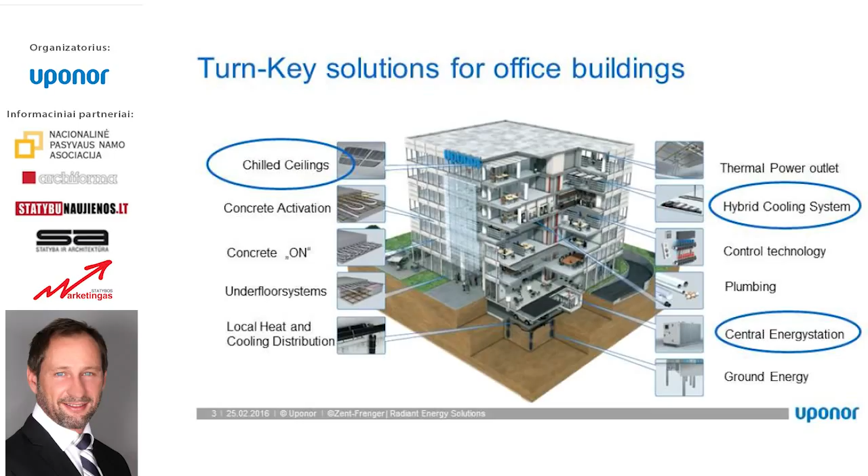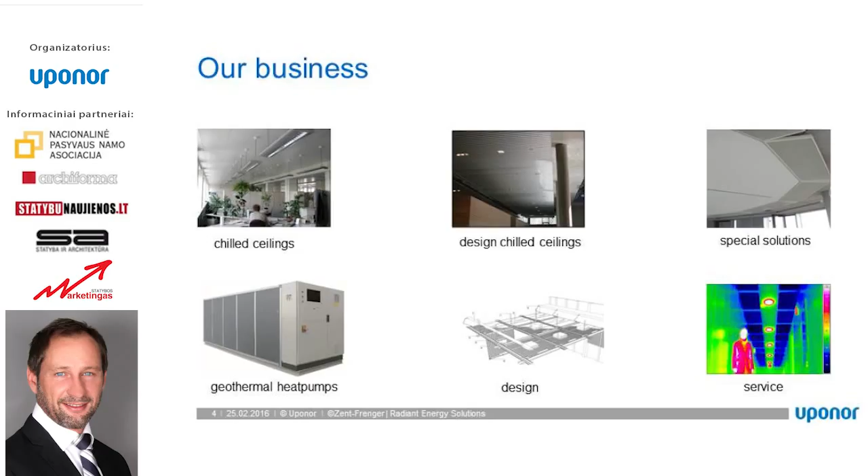Our business is to create ceilings, whatever kind. To design ceilings, special solutions, geothermal heat pumps. We do design for the ceiling system itself, for sub-constructions, and finally also for maintenance and service. You can see some pictures. This is the range of what we want to do for you, and where we want to support you for your project.

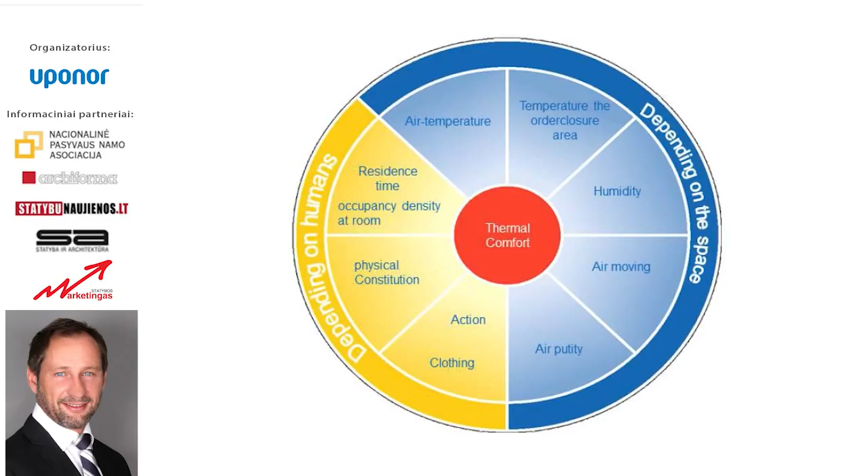What we can do is the part depending on the space, on the room. And there are really big points: the air temperature, the air movement, the draft, the air purity and the humidity. These blue things are all things that we can create, that we can design with engineers and architects. There we, as experts, are responsible.

And when I search via Wikipedia for thermal comfort, I get a response that thermal comfort is defined as the state of mind of satisfaction expressed with the thermal environment. So, in other words, when we go with a radiant system, we are relatively safe that we have no airspeed, no draft. We are nearly 90% always at the right operative room temperature. We can control the humidity and the floor temperature.

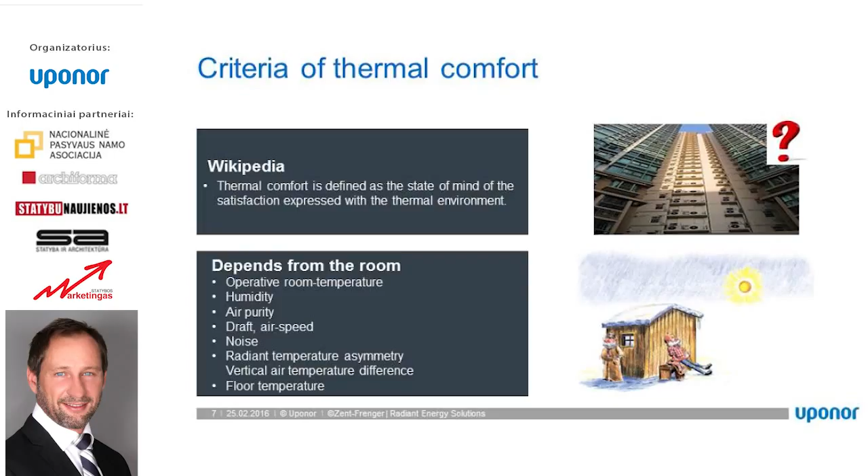For the radiant system itself, I have a small funny picture. You all know the situation when you go skiing and you sit in the sun. And it's the same if the outside air temperature is 10 or minus 10. Always when you're in contact with the sun, this is radiation. Yes? And immediately you feel well.

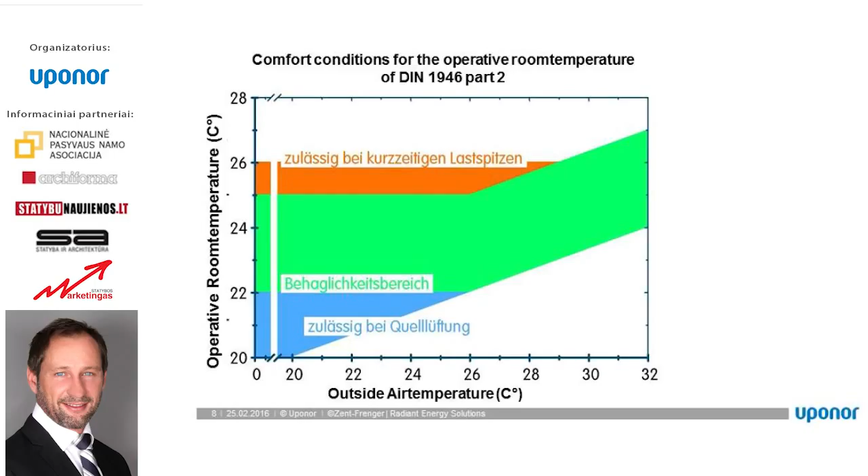So if we have a look into the DIN 1946, there is a definition of an area with thermal comfort in the green area. And there are so many investigations and measurements about dissatisfied people based on the temperature or other things we see later in the sheets. And you can see the axis directly relates the outside temperature and the room temperature. You see there's a small range between 22 and 25 degrees. This is the thermal comfort zone, and that is the zone where we want to be.

And also we know the problem of dissatisfied people based on airspeed. I think everyone knows the assistant who is working directly below airflow, and he feels not well. Yes, and in the worst case he gets unhealthy, and this is the worst case.

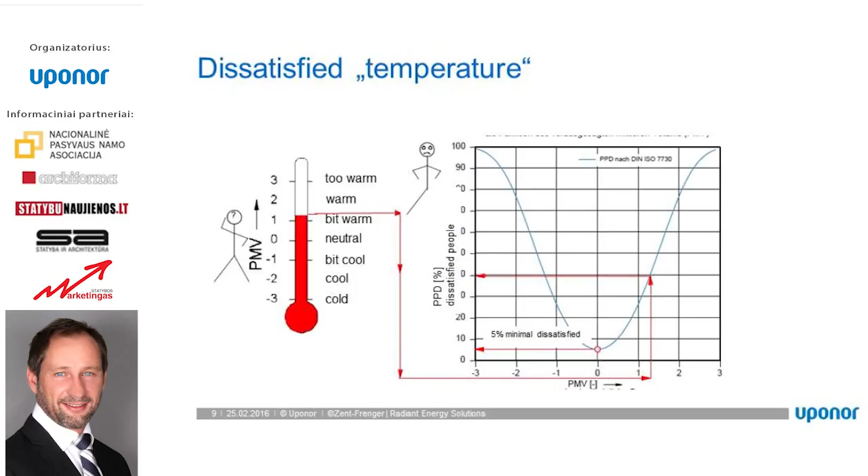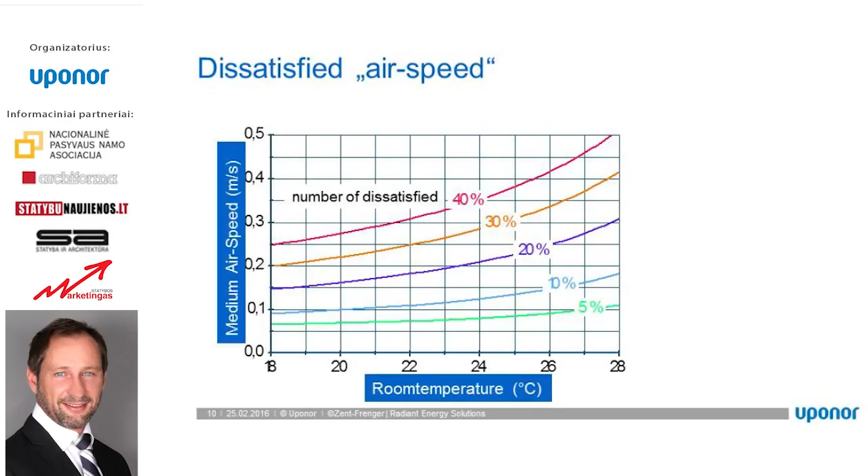And what we have with the temperature is also the same for the airspeed. That means if you design your project with conventional air conditioning systems, you always run the danger of air draft to the people, to the employees. It's also a function of the room temperature and a function of the airspeed. You can really see relatively simply the number of dissatisfied people.

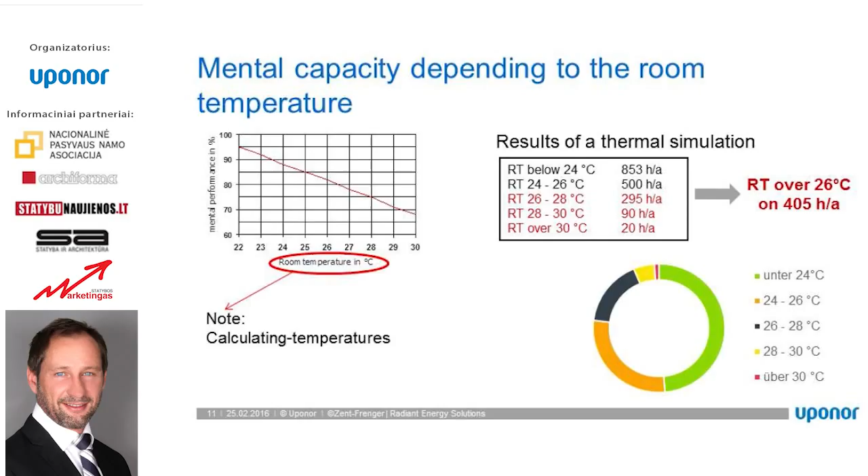Apart from thermal comfort, another very important topic is acoustic comfort. The chilled ceiling always includes, as I mentioned, two parts, the panel itself and the aquifer meander. And when you look only at the panel, as you could see in the small sample outside at the desk, for different panels with different perforations, we earn different acoustic absorptions. You see a standard system, like the small sample outside. We have a perforated metal sheet, and inside is an acoustic fleece.

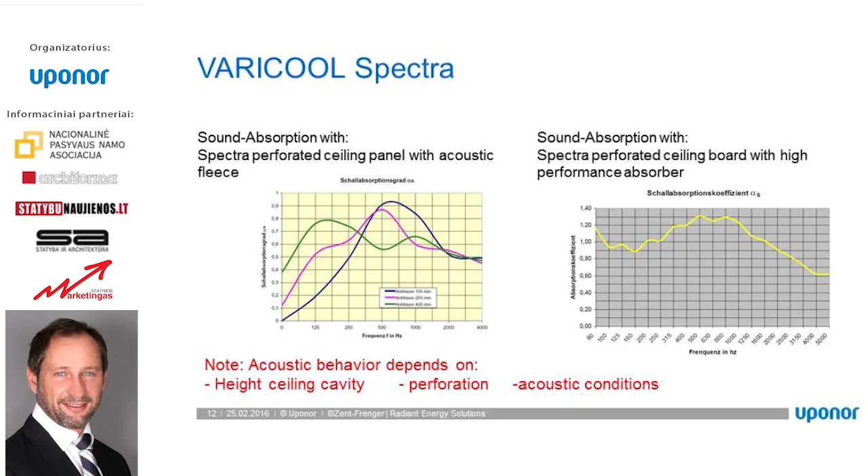And this is the other system, for example, in our system, VARICOOL Spectra, with a high absorber performance system in it. And you see the difference in the absorption coefficient against the standard system. So that means you can control the temperature and you can also control the acoustics in your room.

As a summary of thermal and acoustic comfort, I want to show the main important topics when using radiation systems. The most important thing is the temperature of the room. We have no draft, we have a direct capacity. Remember the sample with the sun and the skiing tool - this is direct contact with the energy. We can absorb acoustics, and it's also possible to integrate cuttings in the ceiling, like lighting or sprinklers, or whatever else is always possible. Flexible room separation, minimum space requirements - so finally we get in the right direction for thermal comfort.

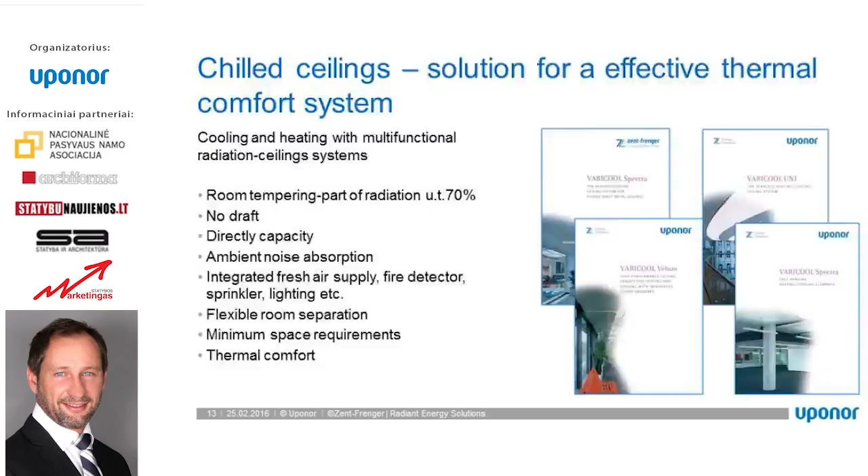So for each design the architects want to have, we can build up a solution with radiant systems. Every ceiling system could be upgraded with a radiant solution. In this range we have the chilled ceiling systems, we also have concrete systems and additional systems, and also geothermal heat pumps. This is what Ray tells us about.

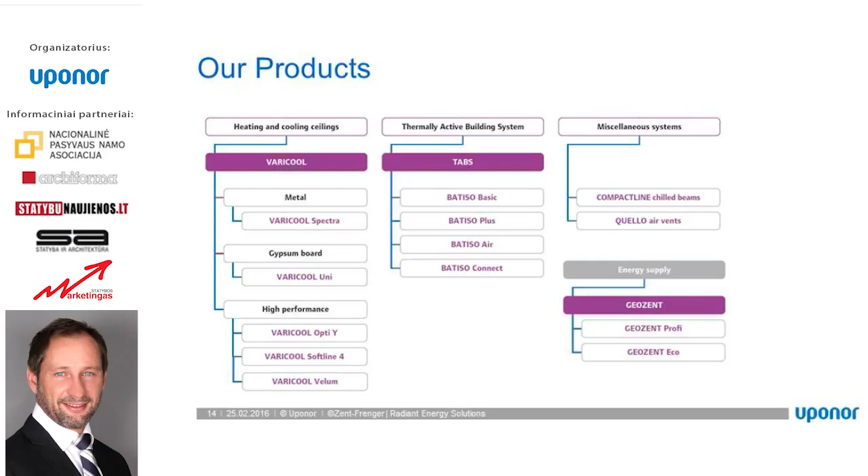But we want to have a focus more on these ceiling systems. We have a part of the metal ceiling, we have a part of seamless gypsum systems, and we have some products as a high performance system with high capacity, also in the case of acoustics.

So let's start with the first product. We call it VARICOOL Spectra M. M stands for magnet technology. The construction is: we have a meander, or a snake, of copper.

Aquifer copper, based in aluminium profiles and fixed from support rails. Then separately we have the panel. Inside you can see the acoustic fleece, and this element we call the register element, or activation, or meander - different names. In detail you can see why we call it Spectra M - the magnets drive inside.

And this is the most important point: that we can really get close with the panel, with the steel panel. We take care that the energy goes the way we want - on the surface from the panel, from the pipe, over the aluminium profile, onto the panel.

So the big advantage of this system, Spectra M, is it could detach from the ceiling panel at any time. That means if you have built or constructed a project, and 5 years later the color of the panels depends, gets spots and scratches and whatever else - we can just remove the metal panel. It's quite simple to change the metal panel, and the register element, the complete hydraulic part, the installation stays in the same place. We never touch them, and this could really be a big advantage.

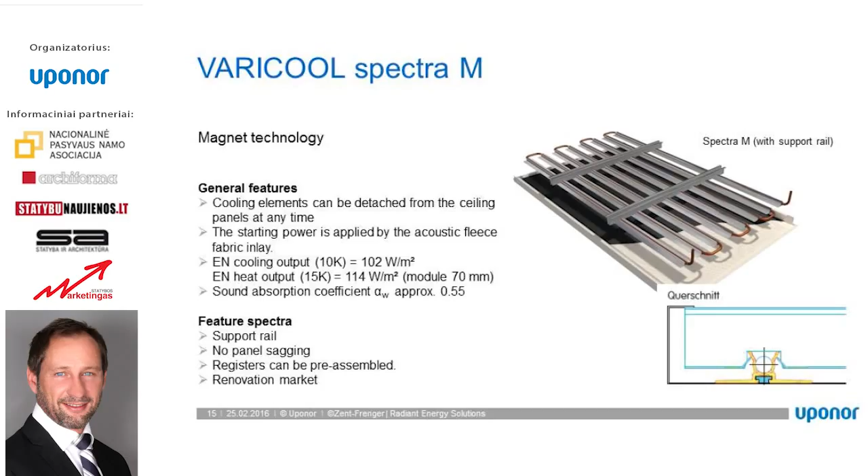The system Spectra K is a bit different - you can see it also in the detail. We have no magnetic stripe in it. This is the reason why we call this gluing technology - in German, Kleben - because whenever you need a bit more power, it's possible to use as a panel system not a steel panel, because of the magnetic requirement, but an aluminium panel. So we can earn an additional nearly 10% more capacity, but only with a gluing system.

We do it customized also for the Spectra M systems, in every range, with every number of rows, with every kind of pitch you need between them. You can do it all customized, especially for your project. But there are also some standards with cassettes of 600 by 600, or the German standard of 625 by 625.

This kind of ceiling you can very often see in supermarkets, schools, or some office buildings. And from the capacity, we talk about 85 or 95 with 6 rows. You can see the difference is not really far from the magnetic technology.

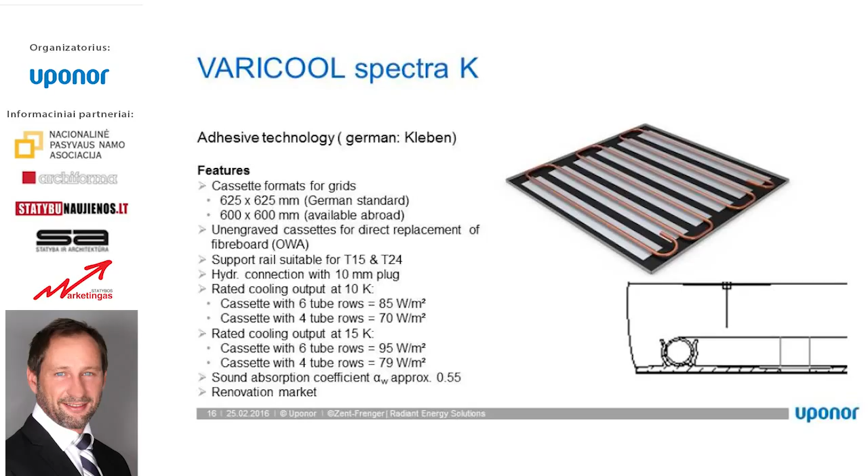The Velum system, we call it ourselves a hybrid system. Hybrid in the case that we talk from a radiant system, from an air system, from an acoustic system, and also a storage system.

So I'll tell you why. When you have a look at the construction, you see the aluminium profile. It will run on the below side, and it is also possible at the same time to run on the upper side.

And when the function goes to the upper side onto the concrete ceiling, we can store the energy into the concrete ceiling. It's mostly effective when we do this during the night, and we can save up to 30% more energy.

During the day, we stop the water circuit, and the concrete ceiling can stay in touch with the room until the energy, or the charge, is empty. Then we continue with the normal way of doing radiation.

Between these profiles, we use a high absorber acoustic element, and it's also possible to use this channel as an air channel to supply the room with the air necessary for ground airflow. Altogether, these are really big advantages, which is why we call it a hybrid system.

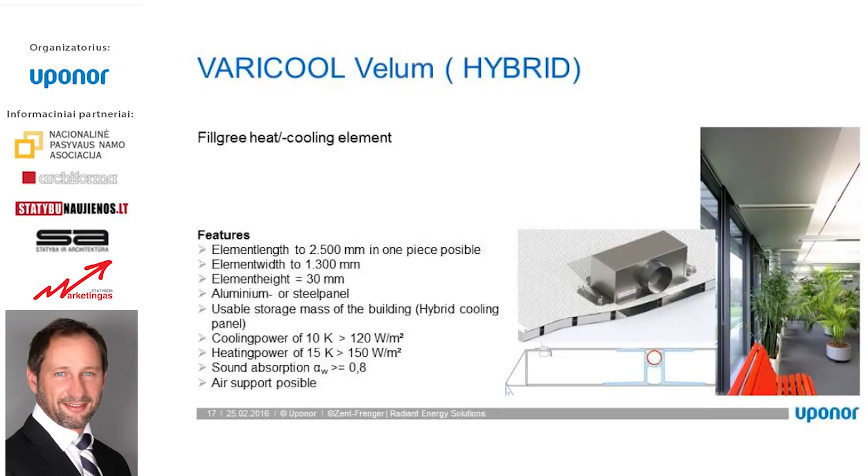The maximum length for this element is 2500mm, with a width of 1300mm, and a big point is the element height of only 30 millimeters. For example, in Switzerland and Austria, it is a bestseller because architects love it—it's a really small design.

The same Velum system, you can see here the big point again is the design with only a height of 30 millimeters, available in a rectangular shape or also in a 60-degree angle. It looks even lighter when shown this way.

I'll talk about the airflow. It's possible through the perforation to flow the air upward or downward—both directions are possible. Remember the air function combines the radiation part with the additional convection part, and it's also fantastic for saving energy by connecting the concrete mass with this system.

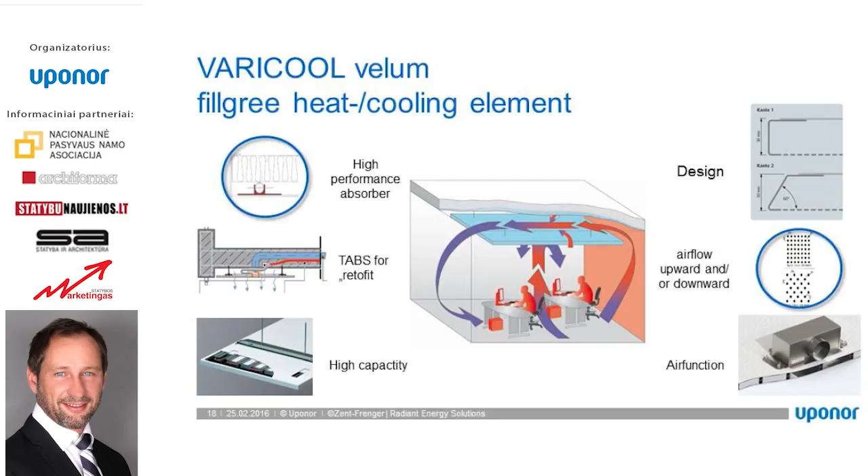Finally, the high performance absorber. We have some projects where we sell and use only the high absorber element without activation. It's a really important feature.

Then we move on to the different possible emitter or register types—this is only a small overview. When we create a design, as you'll see later in the calculation sample, we start with what the project needs in terms of capacity. This is our starting point.

That means we can create every kind of register—whether with 1, 2, 3, 5, 6, or 10 pipes. We can also change the pitch between each single aluminium profile, using steps from 80 up to 150 in increments of 10.

It's also possible, when you have a light inside the panel, to make a cutting with a larger pitch in the middle so that you can use a speaker or a lamp or whatever is needed.

Finally, an additional system we call System Quello—we'll see it also later. In this additional air system, we can lay the copper pipes in between, and the big advantage is that you don't lose any active area when you have an airflow system in it.

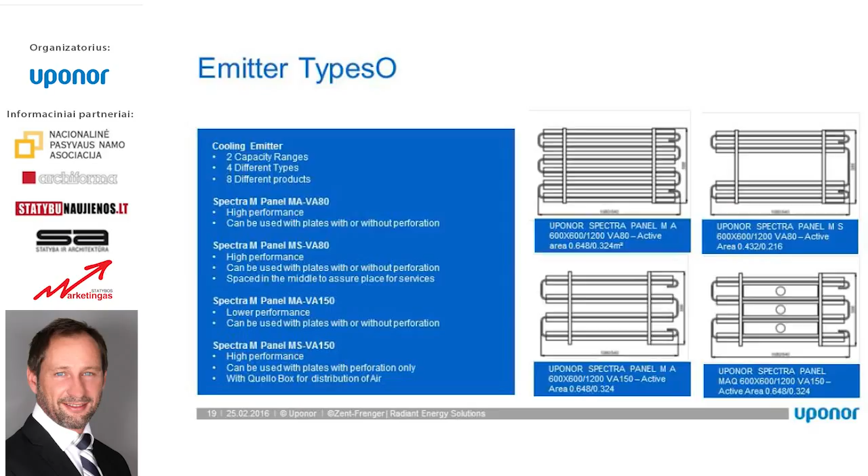Then we come to the seamless gypsum plasterboard system, which we call UNI. From the construction side, it's nearly the same as the Spectra system—you see the meander, the aqua meander, connected with a rail system. The difference is, remember the detail of the aluminium profile where the copper pipe was nearby on the surface of the panel—that's not the case when we use a plasterboard system.

We lift up the level of the copper pipe so that you can use a screw—a definite screw with a height of 21 millimeters—and screw it in anywhere you want. You never damage the copper pipe.

As a montage rule for our montage people, we use the definite screws of 21. For mounting it's quite simple: you have a clip, you clip it in the subconstruction, nearby 10 clips per square meter, and then you fix, and the work is done.

A big advantage is when you have inactive or passive areas. I know competitors need to use an expensive aluminium profile for inactive areas, but not in this case. The height of this aluminium profile is the same as a normal standard rail system you can buy on every corner.

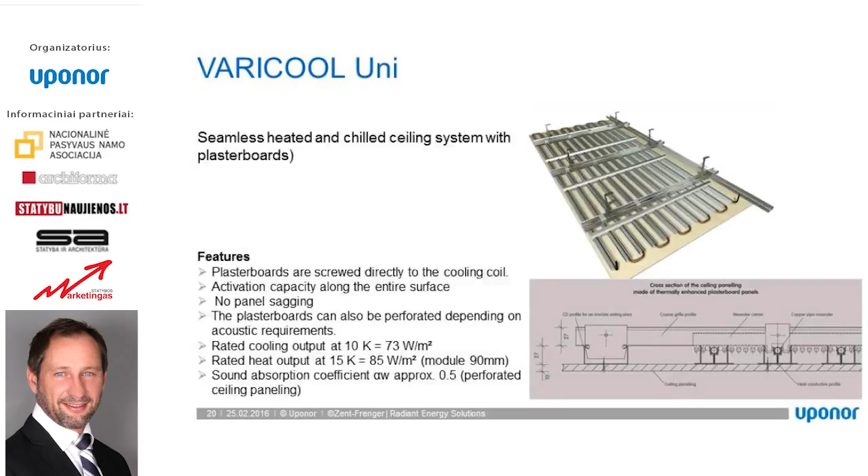From the power side, we have less capacity, nearby 70 watts per square meter. The reason is clear: gypsum is an energy break.

When we use this plasterboard, we use especially what's called thermoplate, a panel made under higher pressure. It's also possible to use a plasterboard with graphite parts, which gives a bit more capacity. This is all possible.

Now we've seen the overview of high performance systems. This is one of them, we call it Softline 4. The big difference is we need an additional panel or plasterboard with the energy profile, which we use as the surface from the ceiling. It's made of aluminium, and you can see the radiation part and the convection part.

We call this an open ceiling, meaning the convection on every part can grow there. So the capacity is more and more growing, up to 130 and 140 watts. Another system, Opti-Y, I have no sheet for, is at the maximum end of the capacity with 160 watts per square meter. It's also an open system.

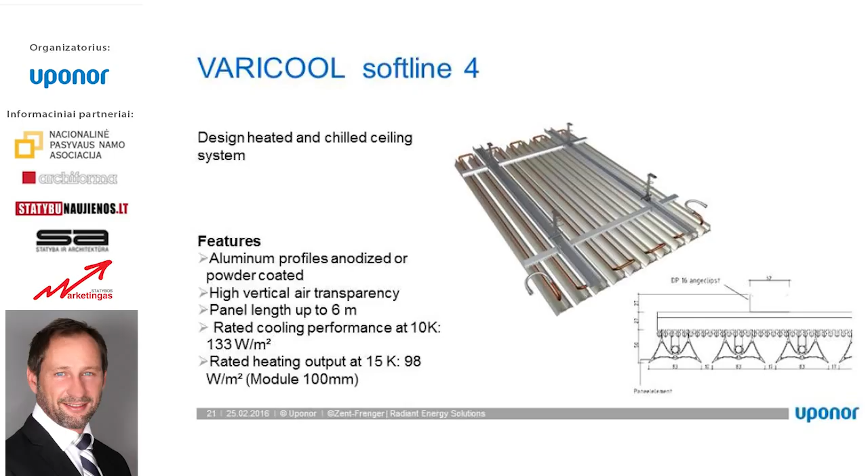Finally, from the products, I'll talk a bit about this additional system called Quello. It's an invisible, integratable air system for system Spectra M, and also the seamless system UNI. It contains air profiles connected with the air box, which you can put between the register elements, and from the surface you see nothing.

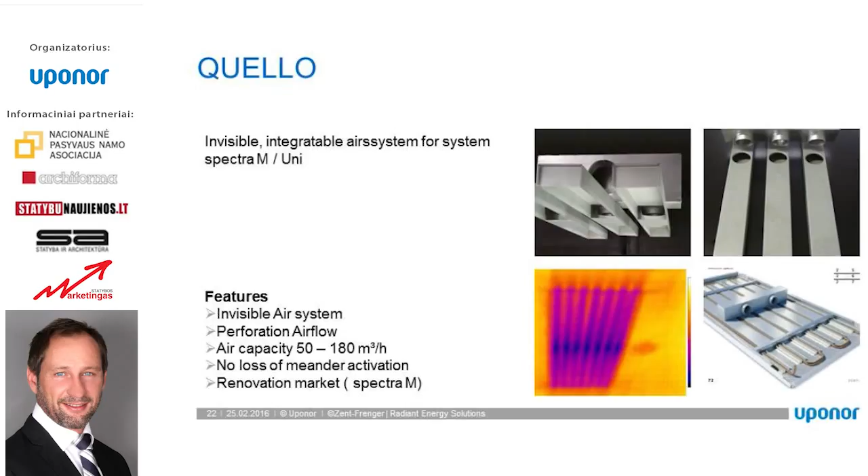Only the same optic as the neighbor panel. This could really be a high benefit for the base air need. The capacity ranges from 50 to 180 cubic meters per hour, depending also on the perforation the architect selects, and it's ideal for the renovation market.

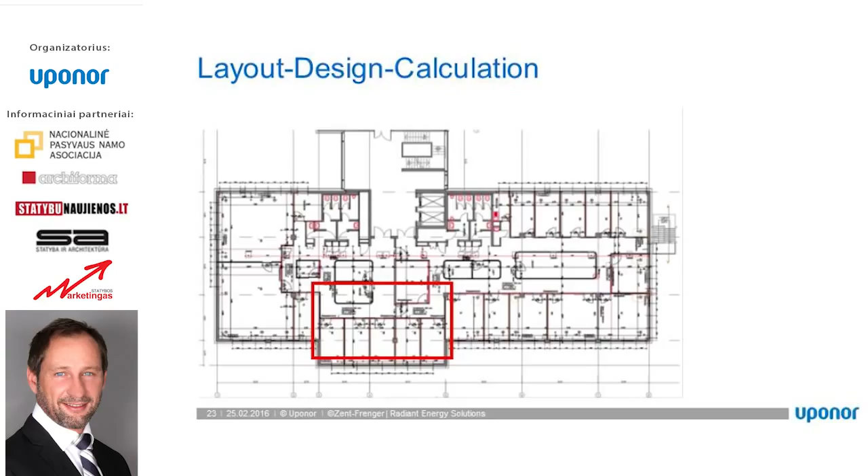Now I want to go with you into the practical side. This is a typical sample for doing design and calculation. We get the design from our client and put it into a single part. We watch out for the walls, the dimensions, and the axle of the rooms.

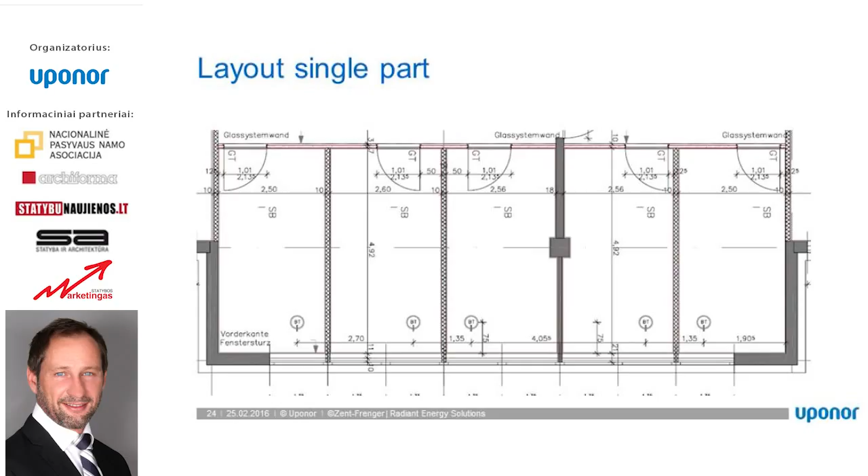We need all information about the dimensions of the lightings and sprinklers. We have to know it so we can create the dimension of the panel itself and also create the subconstruction. This is important.

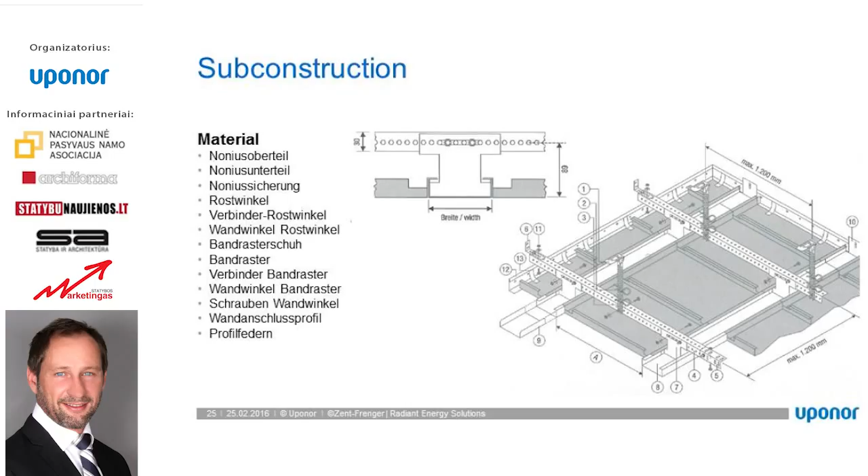We decided for this sample to go with a secret panel system. There's a panel system and a secret system, and the panel itself always lies into or onto this rail system. This is a typical view for other rail systems with hangers, edges, screws, and so on. This was a cutting of this system.

We also have to define the panel itself. It looks like an easy small panel, but there are decisions behind it. We have to know if it's a steel panel or an aluminium panel, and so decide if we can go further with a magnet system or a gluing system. It depends on this side.

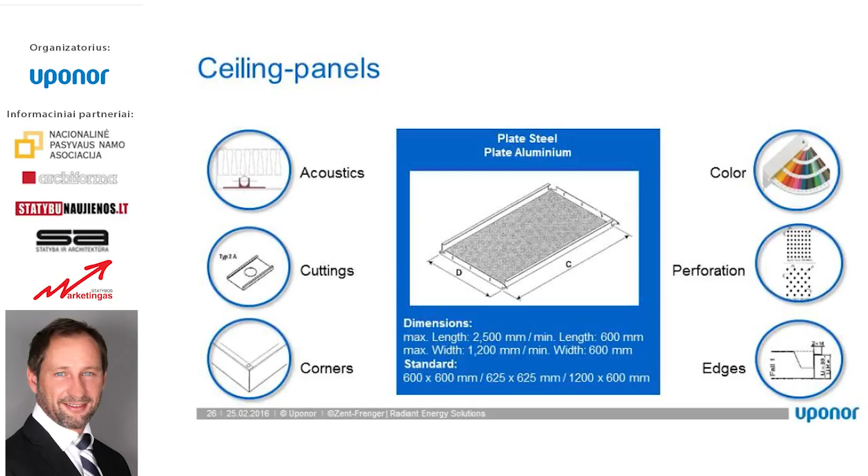I have to watch out what possible dimension is for that. I have to decide on the color, normally white, but from the RAL colors I know 5 or 10 different types of white - we have to define that. The perforation is responsible for the acoustics. We have to watch out about the edges, the corners, the cutting for lamps and sprinklers, and finally also if we need additional solutions for acoustics.

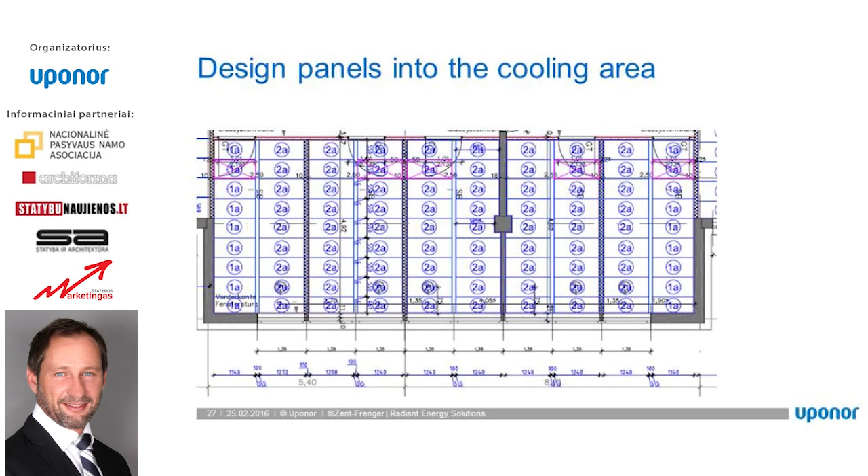So if I have made this work, this design could look like that. We can see here the sections and the inlets from the panel. Yes, we have two types in this case. And finally with that, we can start with the calculation, with the hydraulic calculation for activated panels. And therefore it's really important for us to know what the flow temperature of the water is. The flow temperature, the return temperature, and also the room temperature.

And when we specify a system and we define a pitch, in this case 80, we get a result for the rated power. Then we also have to look into the details of the room, because, as I told you, the power you earn is different when you have a completely closed ceiling with no convection. When you have only the joints between the wall and the ceiling, a small joint of 20 millimeters, you earn up to 8% more capacity. This is important, that we really examine every single room.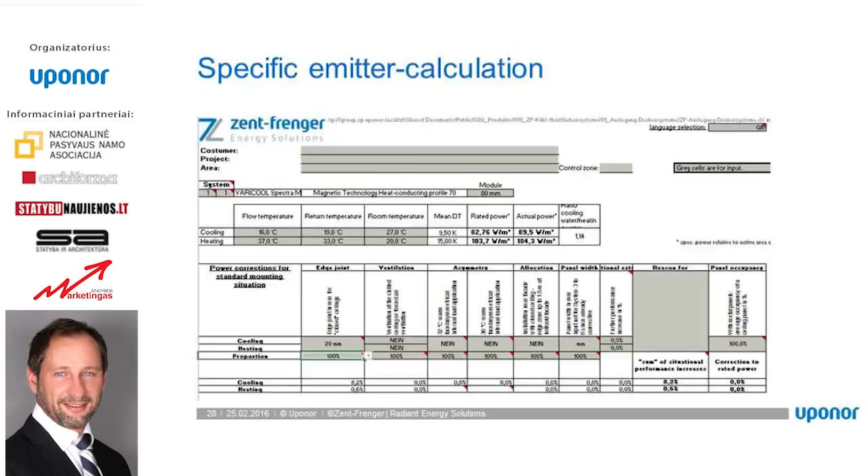And this, together with a ventilation system, when there is one, in this case there's not, this additional ventilation system can give an additional minimal part of power, so that we have an actual power between 82 and 89, based only on this part when we open the ceiling in a small joint. So then we have created the activation in this form. This looks like this, and it's okay. We have position one type and another type. It's a bit shorter. We have types where we have to change based on the geometry of the room, and so on.

And now we have a look into the hydraulics. We always say, okay, we have a room, and this room is our control loop. And this room can contain more water loops, because it's not possible to endlessly connect register, register, register. When we calculate this, we're talking about a pressure loss. And the maximum pressure loss is nearly 25 kilopascals. So our job is to make the hydraulic calculation in such a way that every single water loop has nearly the same pressure loss, to get a really stable function and a completely symmetric radiation power.

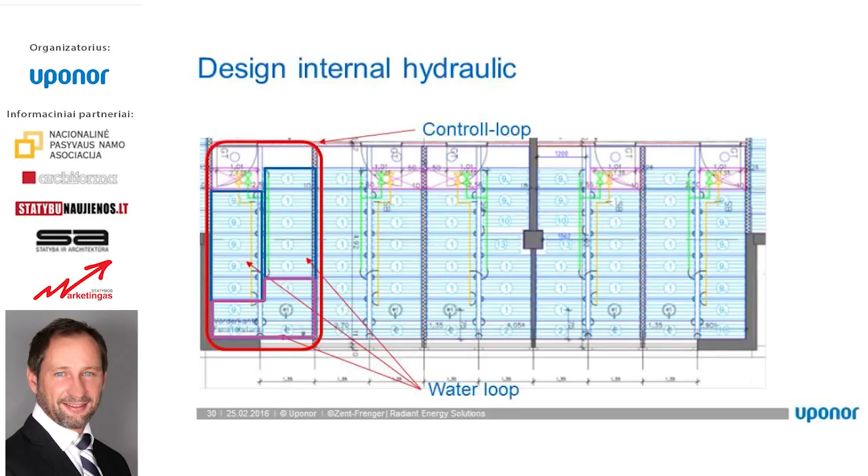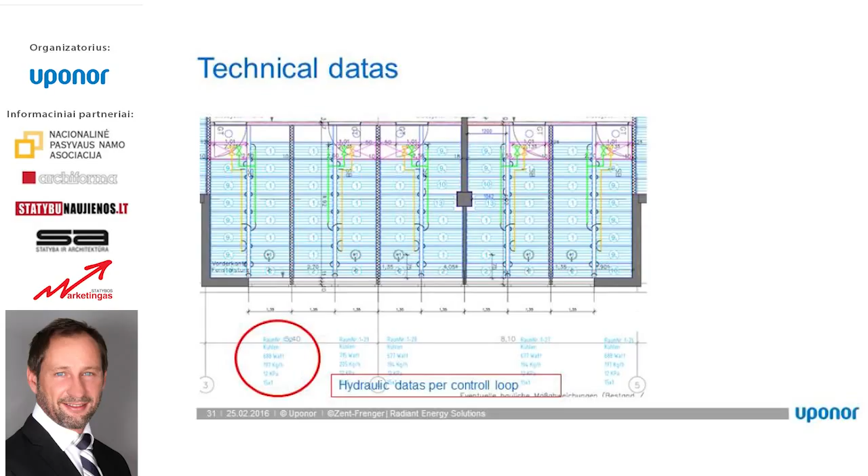Here you can see the valves and the piping are connected in the corridor. Yes, and that's all. And finally, per room, it's also important for the regulation. For the complete room we have 688 watts, 197 kilograms per hour of water mass, 12 kilopascals, and for the main supply a copper pipe with a dimension of 15 millimeters. These are the main messages of the design for our installation people and also for our supervisors on site. And then I can implement this small research onto the complete level and also onto the complete building.

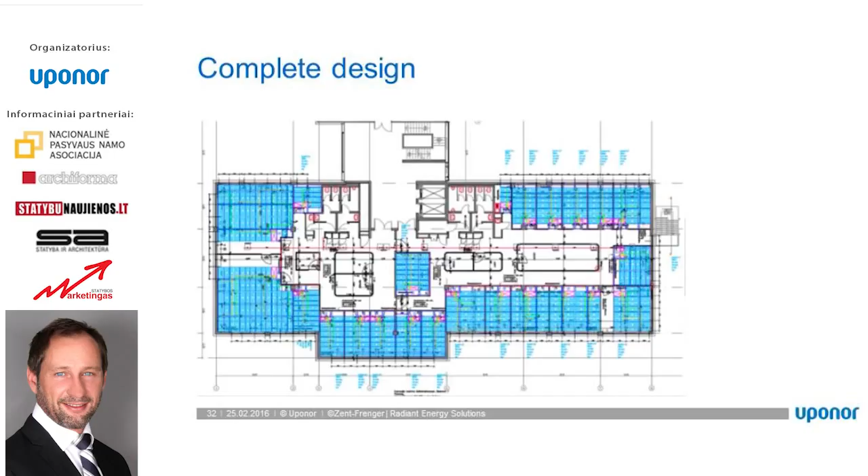So our responsibility is to promise a sustainable solution, when we talk about comfort, health or efficiency, also sustainability through high quality products and a long life cycle, and also sustainability to protect our environment. That means all materials and all systems you see can be easily separated to recycle and save resources. As we heard some information about LEED, this is really a main issue for these certifications.

And every certification you see, and mainly the test reports, we do by independent institutes. This is quite important. Our competitors make their own test reports, so you can believe them or not. But this is a general rule for us: every test report for every application of a system, we do it by an independent institute.